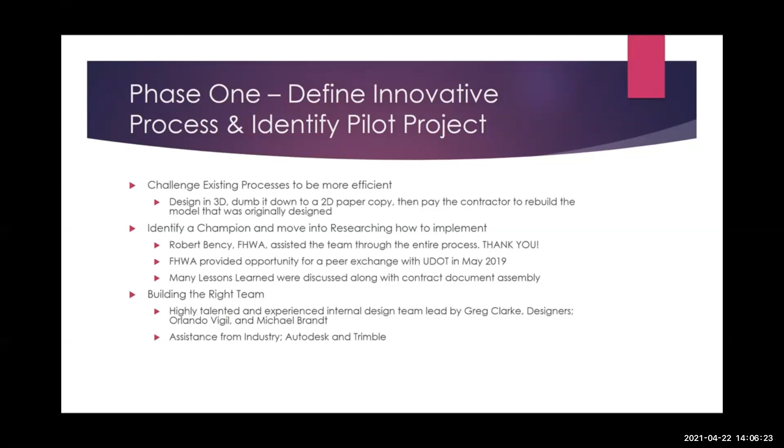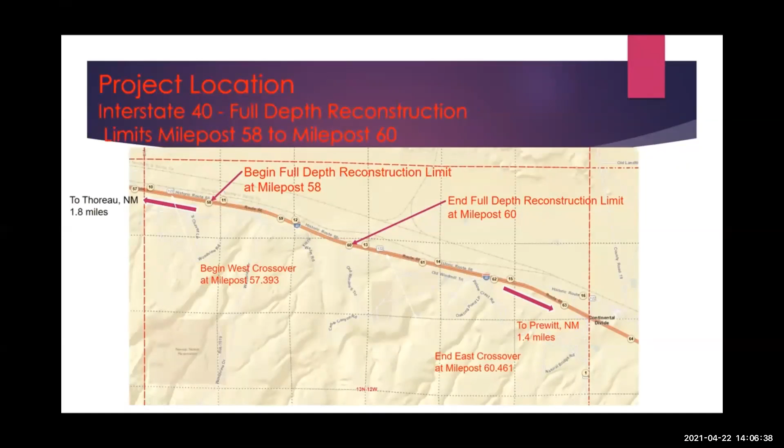The pilot project which we selected is the 2-mile full reconstruction on Interstate 40 from mileposts 58 to 60. The control number is 6100-950.

Phase 2, piloting the software. The FHWA EDC program does have a STIC grant which DOTs can apply for in order to help with the implementation of the EDC. With the STIC grant that was assisted by Robert Bency, we were able to purchase the licenses for BIMDocs, which was the platform we used for collaboration.

All milestone reviews were hosted in BIMDocs and comments were captured electronically through BIMDocs. It was really easy to verify or cross-check review comments from milestone to milestone. Also, in addition to the STIC funding, we were also able to use iPads with cellular service that allowed both design and construction personnel to be connected with the contractor at all times.

Phase 3, develop construction documents. This, in my opinion, is the bulk of the project. Several notice to contractors were created that were completely outside of the normal process. The first and probably the most important one is an NTC regarding the engineer seal. Since the 3D model was actually within the document and not necessarily the plan sets, we were unable to sign and seal every sheet within the plan set.

Therefore, what we did was we added the seal to a notice to contractors that indicated that this seal was representative of the 3D model. In addition to that NTC, we also had several others. The second one was for the contractor to accept and adopt the 3D model as a legal document. Upon their acceptance, they're accepting the model that they will further own. At this point, we are transferring the liability from the DOT and onto the contractor.

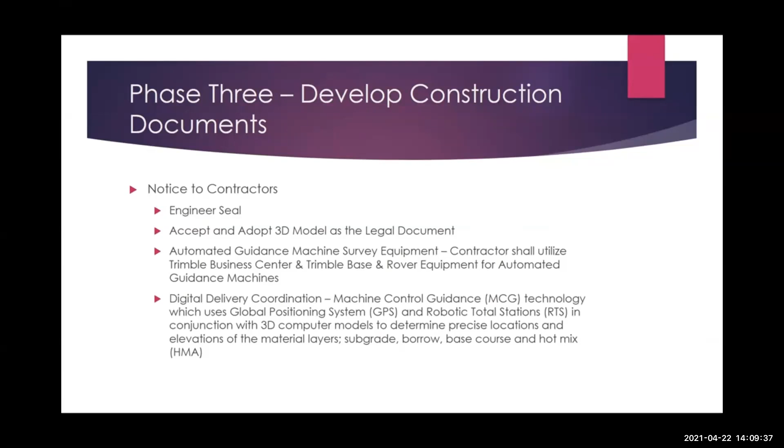The machine control guidance technology uses the Global Positioning System and the robotic total stations in conjunction with the 3D computer models to determine precise location and elevations of material layers, subgrade, borrow, base course, and hot mix. This NTC was specific for the construction inspection. They are able to verify locations, elevations, what have you, with the rover which the contractor provides.

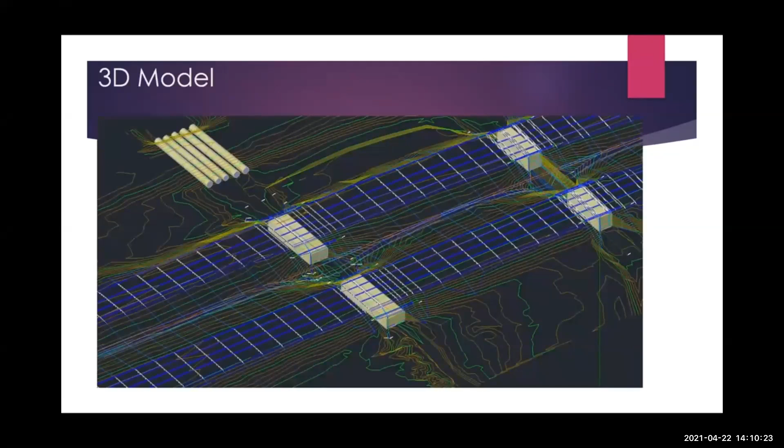Lastly, phase 4, implementation. We did have a mandatory pre-bid that was held in September of 2020. The project did let in October 2020, and F&F Construction was awarded the contract. They had a mandatory start date of March 1st, 2021, and they anticipate completion by 2021. They have since initiated training on the rover for the NMDOT construction personnel, and they are in the very early stages of the project. Here's a screenshot of a portion of our 3D model that was provided to F&F.

Moving forward, EDC-4 has allowed us to basically catapult NMDOT into EDC-6, which is a digital as-built. Since we provided the 3D model for construction, we expect to receive a 3D model as an as-built in return. How we're going to implement EDC-6, we're going to mirror the same processes as EDC-4 with the implementation of new technology and new software. And that is later to come. We haven't worked out all the kinks and defined the actual process, but we're moving forward with that and looking forward to our successes.

That is the conclusion of my presentation. Rather brief, but a quick insight to how NMDOT is digitizing construction.

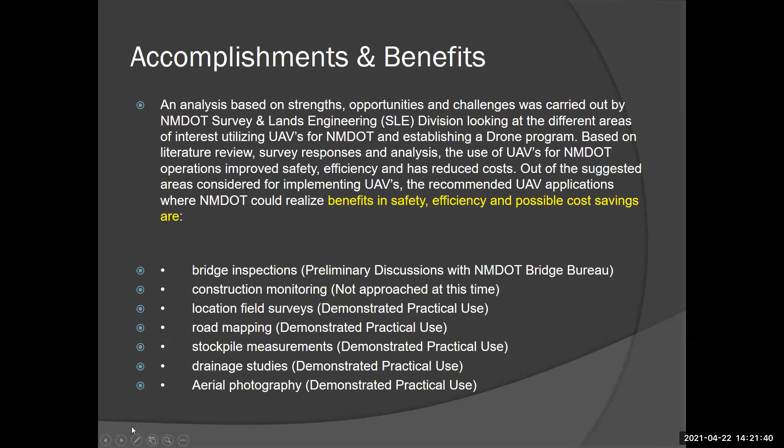With the attached NMDOT unmanned aircraft system mapping procedure checklist that was developed by Survey and Lands Engineering, NMDOT has currently performed work with UAVs in support of drainage studies, aerial photography, location surveys, and existing right-of-way conditions imposed on aerial imagery to support litigation. NMDOT has realized the benefits of safety, efficiency, and cost savings in these applications.

I highlight safety because I really think that that's the biggest benefit that we've seen using drones with our field crews out, surveying out the roadway where you have some steep cut slopes, areas that are hard to navigate to on the ground, with your boots, and trying to get instruments in there to get topographic measurements. We've really benefited from the drones there.

All UAVs are currently managed under Survey and Lands Engineering. They're operated by SLE staff that are certified FAA Part 107 licensees. Part 107 license requires the pilot to ensure that the drone is safe before flying by performing pre-flight visual and operational checks of the UAV to ensure that safety pertinent systems are functioning properly. UAVs will not replace many of the current activities that Survey and Lands Engineering performs, but it will complement and enhance them in regards to safety, schedule, and value.

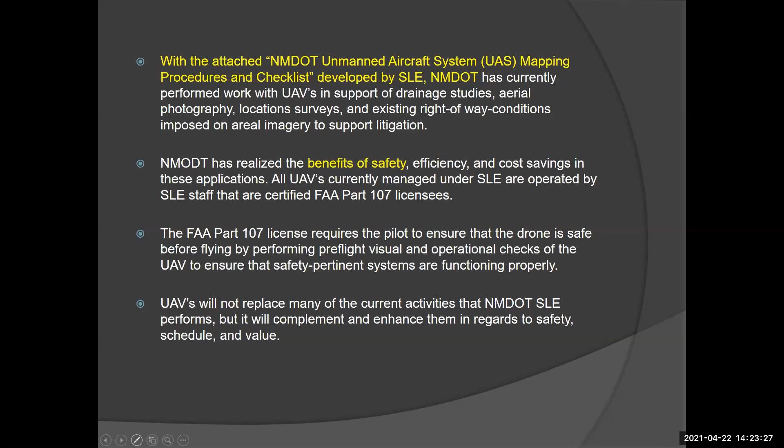Part of the pre-flight checks that take place on the equipment: batteries, firmware updates, airspace checks, and weather conditions are all important before a crew heads out to utilize the drone. They have their pre-flight checklist that they'll go through, the crew that's out in the field operating the drone. Sometimes it's our surveyors. We have surveyors that are Part 107 certified that will use the drones. They'll fill out this checklist.

We have our geospatial unit also who will request to go out and do flights in support of our surveying and mapping on projects. Especially we have a fixed wing drone, and there's a slide later on and we'll show a photo of that. But the geospatial unit operates that, so they'll get scheduled out to support with the use of that drone. At the end of a flight operation, they'll go through another checklist, checking the equipment before taking it back into storage.

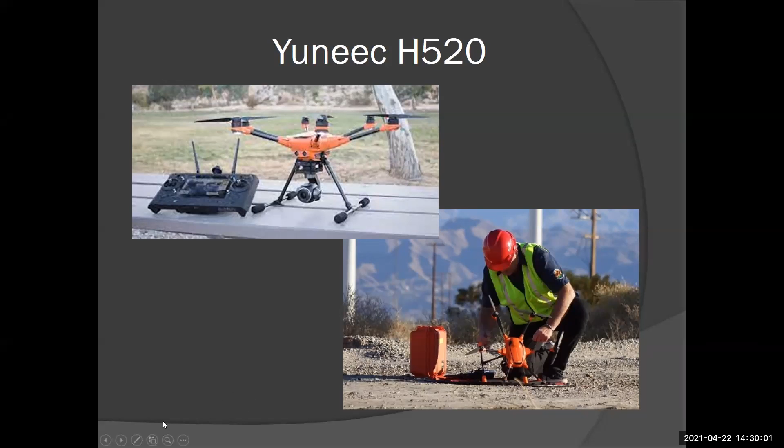The imagery that it captures is amazing, the quality of the imagery that you're looking at. And with that being said, the better the quality of the imagery, the larger the files are. So when we're flying some of these projects and we have an orthomosaic of 3 miles, it's probably not practical to import that into Civil 3D as one image. It'll just bog it down, but we can definitely cut the imagery down to areas of interest for that detail. And I'm going to go over some projects in a little bit and show you some of the mapping that we have done and the quality of the imagery that comes from the use of the drones.

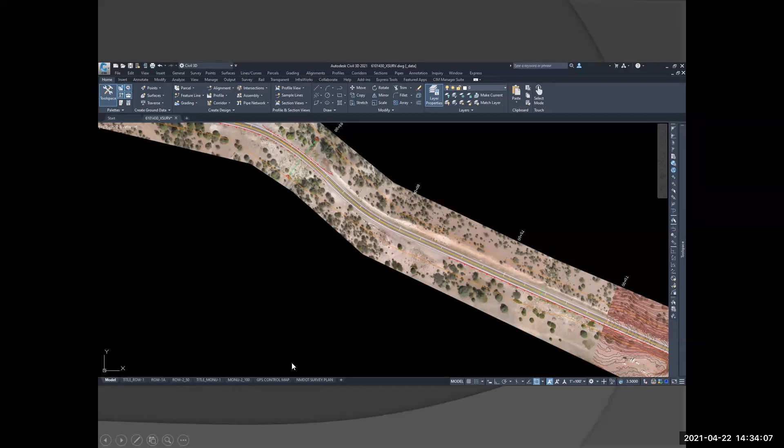Here's some of the mapping that was produced from just the acquisition of the data with the drone, showing the contours in their topography. And then a 3D model view from Civil 3D, looking at that surface of the mapping that we're able to produce.

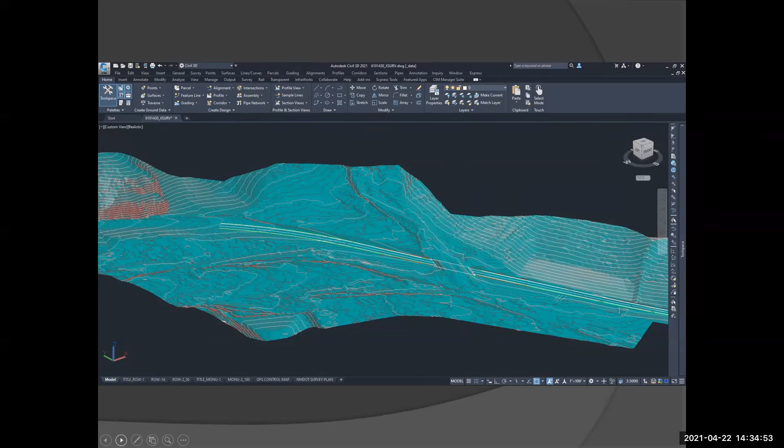Structure of the bridge is right here, but it's very valuable to us to be able to go out and not have to get a high flight for photogrammetry here. So cost savings are big to be able to get surveying and mapping for this project and support of design.

This project right here is US 64, and there's Cimarron, another bridge structure roadway project. Mapping upstream and downstream, we know that's significant for drainage. And there's big cost savings here when we don't have to get an airplane up in the air at a high flight of 1,500 feet to fly a small project like this that we can manage with the drone and get the coverage upstream and downstream needed by drainage.

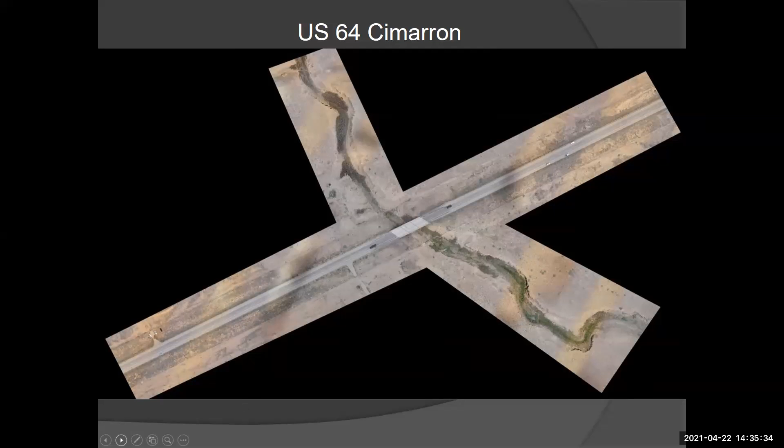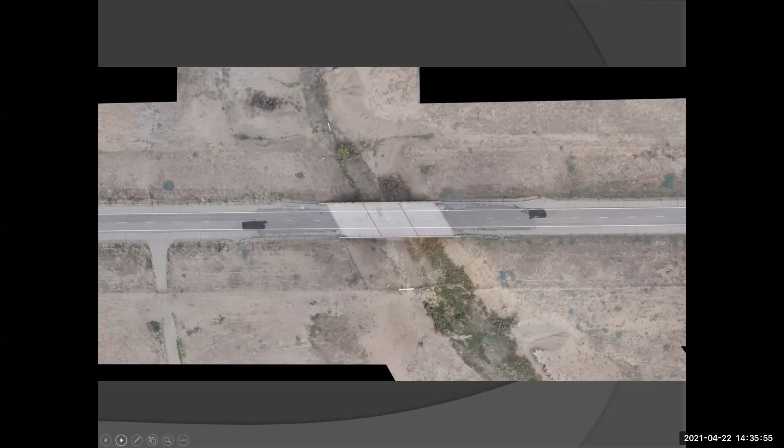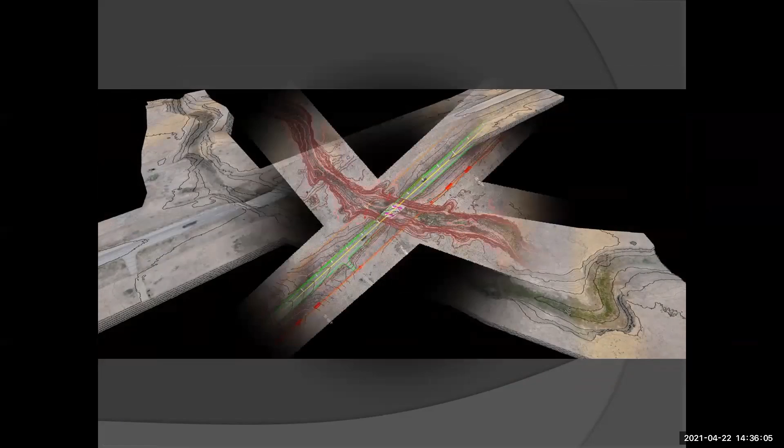And the quality of the image is great. You can zoom in. If you're looking at imagery that comes from high flight and you're zooming in and they're half-foot pixels, you're not going to see the striping on the roadway like you're seeing here. There's contours that were produced from the aerial imagery that was acquired. Overall mapping surface that was prepared.

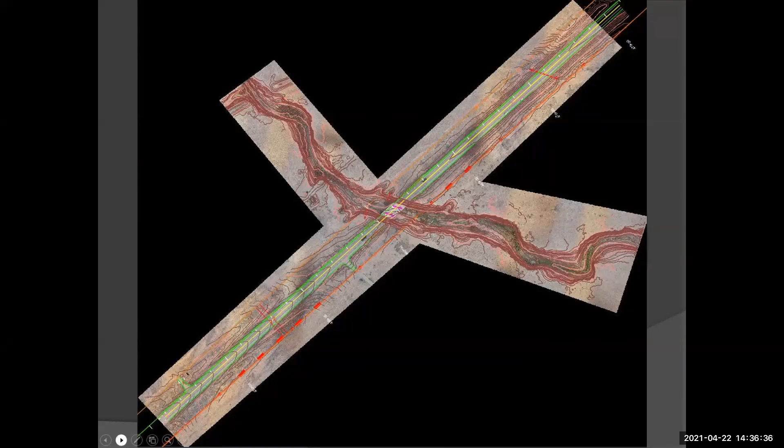Like I said, this is hybrid. Probably 85% of it is from data acquired utilizing the drone, and the 15 to 10% is ground survey, and that's mostly going to be the roadway, asphalt, and bridge, plus any other location items that we pick up on the ground and incorporated into this. There's a 3D view of that in Civil 3D.

This project right here is just for imagery only, is what we requested for. There's some areas of, I'm gonna go back real quick, but areas of interest that they really wanted to look at. But we went ahead and flew the corridor of the project. I think this was 2 miles plus or minus in there. But this right here is another orthomosaic that's just really large. So we have to be able to cut that down to those areas of interest to bring into Civil 3D.

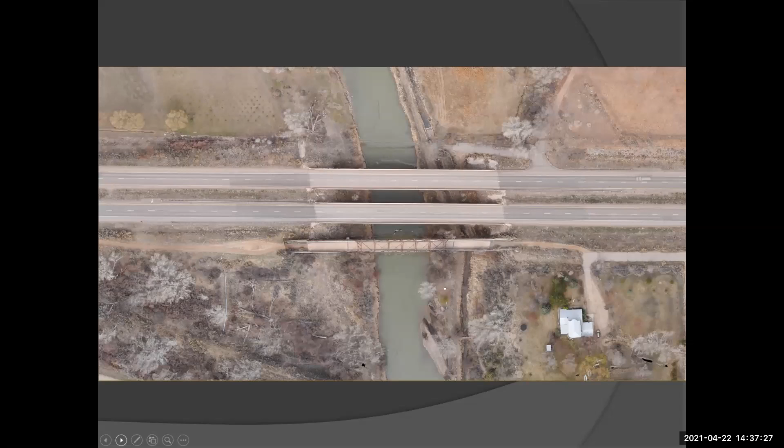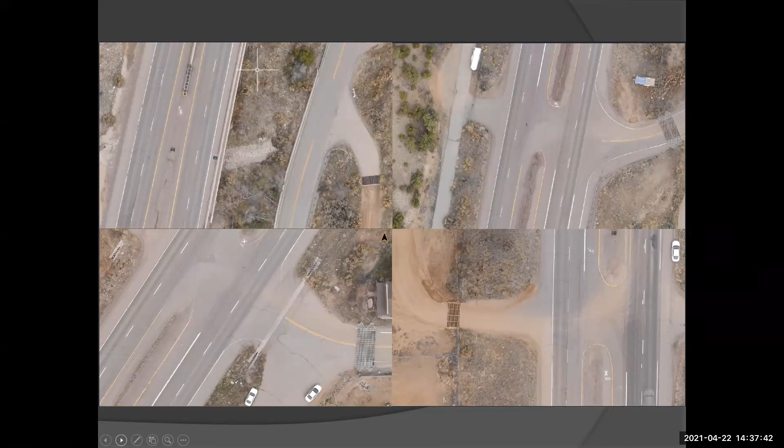Right here we have a tile of those areas of interest that they wanted to see. And I believe their interest was in these cattle guard areas. So we go through there and look at these images. This is from the eBee fixed wing drone. The detail in the imagery is just amazing and what you're getting here. That's the last photo of that one.

I want to finish the presentation with the video. The video was prepared in 2018. So this is when we first started working with drones. I think it highlights what we were thinking back in 2018. I think it was August of 2018, highlighting where we wanted to go with it and the direction we're going in with it. And then being able to also participate with the EDC 5 initiative of UAS. So I want to show this.

Not all the staff that are in this video are still with the DOT. Some are at the districts. Some have moved on. Some of the staff that are part of the team working with UAS aren't in this video. Kelly Melton, he's one of the surveyors who works a lot with the data that's acquired by drone. He provided me all the imagery and processing of the data that I just went over. But we got a good team of employees, and I thought this video would highlight that some, so I'm gonna play that.

The DOT currently has a series of 5 drones. 4 are with field crews, 2 down in Las Cruces, with 1 assigned to the geospatial group. The purpose of the drones right now is to not only expedite the survey process, but also safety was the key factor for this. Majority of these people put themselves in harm's way every day to acquire location information for mapping for design purposes. We're still going to use them out there, but we're going to try and keep them out of the traveling public and use the drones to not only expedite the process, but also pick up additional information.

The cool thing about these drones is that we can get aerial coverage that is rectified to the ground. We have mosaics that provide us detailed information. We can also gather 3-dimensional surface data, which will then be taken over to our photogrammetry groups, and they will include the features that they will then add to mapping projects that go up to design. Right now, we do have aerial photography contracts through consultants throughout the state of New Mexico. Majority of our budget is depleted after a couple of projects. Now with the drones, we can pretty much fly every project.

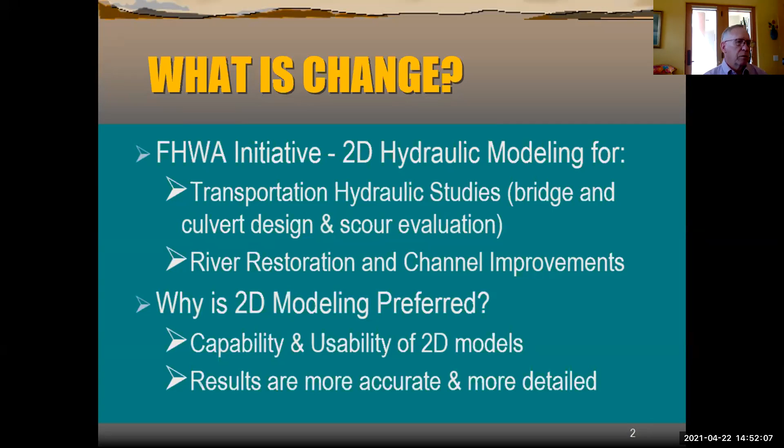Another issue is the models have gotten a lot better to use, and they've got a lot better tools that help us to use that. And so I'm going to skip. 2D or numerical models have been in development, and actually HEC-2 came out in the late 60s, I believe. I guess I'm not embarrassed to say this, but I remember having a shoebox full of punch cards, running a HEC-2 model, taking it down to the mainframe to have them run it. So that was when we actually started moving into numerical models.

Since 2013, FHWA has started using the SRH-2D model, which was developed originally by BuRec for some of their applications. And it's been heavily customized. FHWA has partnered with BuRec as well as with Aquaveo to customize that particular application for transportation hydraulic design. And so because FHWA is a partner, all of the DOTs that contribute to that are also able to take advantage of this program without additional cost.

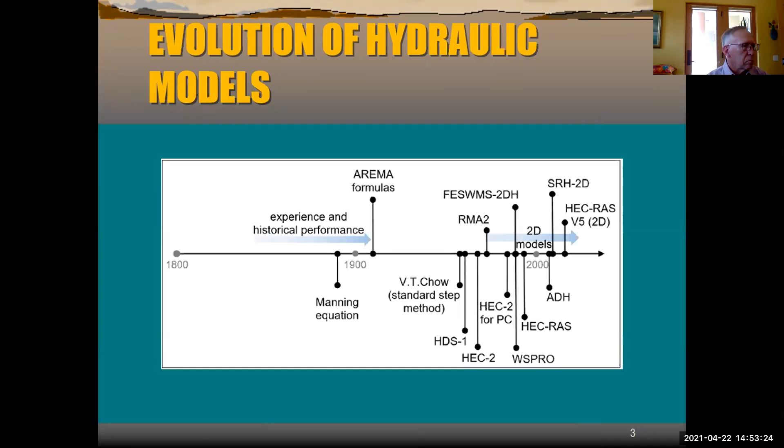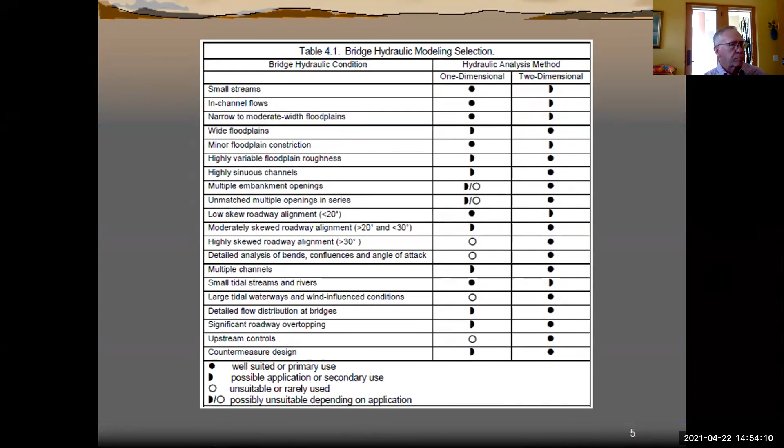Some of the advantages of 2D modeling: this first one is key, that 1D models require a lot of assumptions. The modeler has to go through all kinds of hoops to make sure they have a good model. And a lot of those assumptions can be somewhat subjective. For instance, trying to pick a flow path in a very wide, flat, sandy bottom floodplain can be difficult.

So using the model to actually compute a lot of these parameters based on physical characteristics eliminates a lot of that subjectivity and reduces the need to use a factor of safety. You don't have to be nearly as conservative is the bottom line.

Again, there are very sophisticated development tools available with these models. Some of those take advantage of the kind of quality mapping that Mark and his group can provide, so that as we're creating these models, we can use polygons in GIS to develop the roughness factors for the stream. And so we can get much better, more precise results.

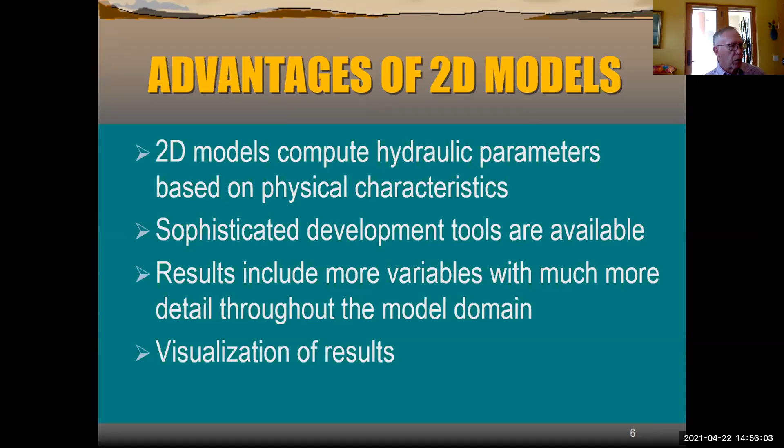The 2D models just inherently have a lot more variables associated with them, and there's a lot more detail that comes out of the model. And finally, the 2D models provide some really unparalleled ability to create a visualization of those results, so that you can show that both to your designers and to the stakeholders and show them precisely what's going on with a particular stream.

There are disadvantages. One, the 2D model typically does require a lot more terrain data, and that has cost and schedule impacts for your project. But there are some pretty good criteria on how to define what you need for terrain data, including your boundary conditions. They need to be far enough away from the area you're really interested in that they don't affect the results.

And so sometimes we need to go half a mile or more upstream and/or downstream to be able to generate those appropriate boundary conditions. And we have to have enough width to make sure that we're containing the flow.

One of the things that comes out of that is we have found that a lot of times, when a stream is hitting the bridge and it's starting to back up, it will spill out in places that we didn't actually expect. And so that's good to know for us. That helps us really do a better job of designing the bridge and making sure we're not creating adverse impacts.